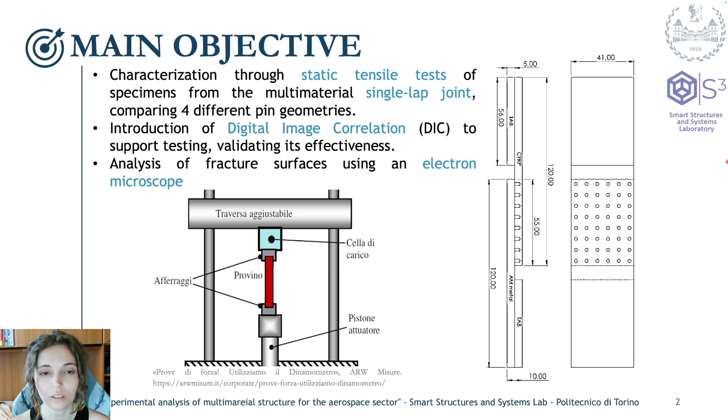First of all, the main objective was the characterization, through static tensile tests, of a new type of single lap interlock joint, introducing digital image correlation as a support of those analyses. The specimens tested were produced with laser powder bed fusion aluminum and with a counterpart made of carbon fiber reinforced composite, pressed mechanically through the pin in order to achieve the joint.

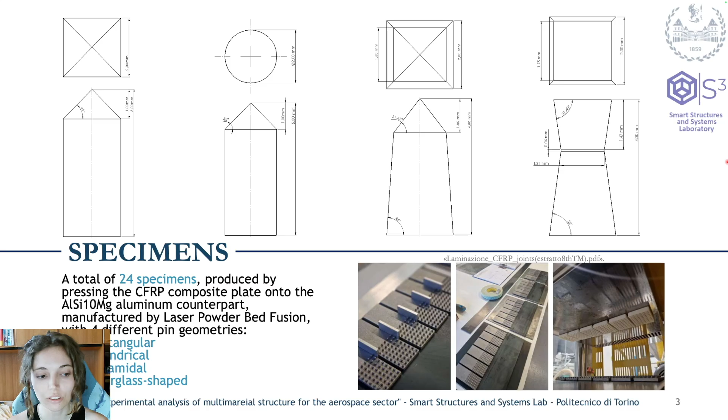We analyzed 24 specimens with 4 different types of pin geometries. We analyzed 8 rectangular, 8 cylindrical, 4 pyramidal, and 4 hourglass shaped. The tensile tests were performed using an instrument, and they led us to achieve information about the maximum load condition that a specimen can carry. We can see from those 4 images, they are representative of the 4 types of geometry.

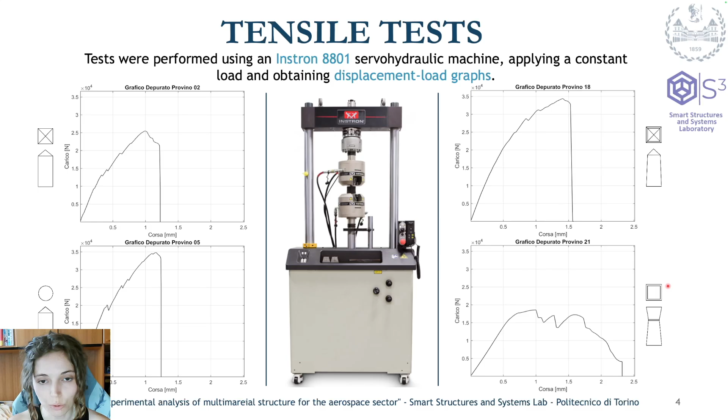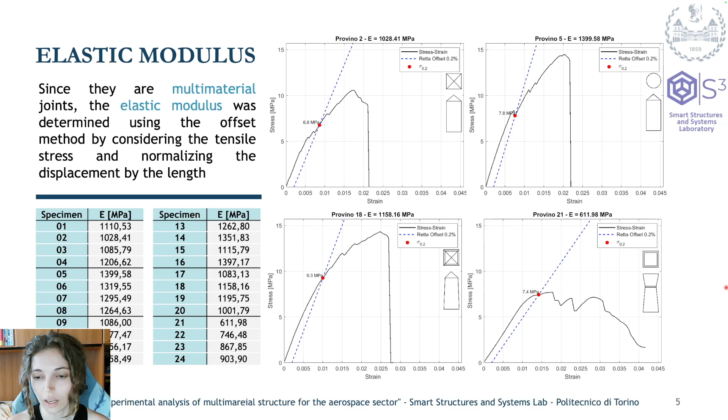We can see in fact that the cylindrical and pyramidal achieve the higher load capability, while the hourglass shaped are the worst of the 4 geometries. And using the offset method, we could calculate the elastic modulus, and once again, the hourglass shaped are the worst.

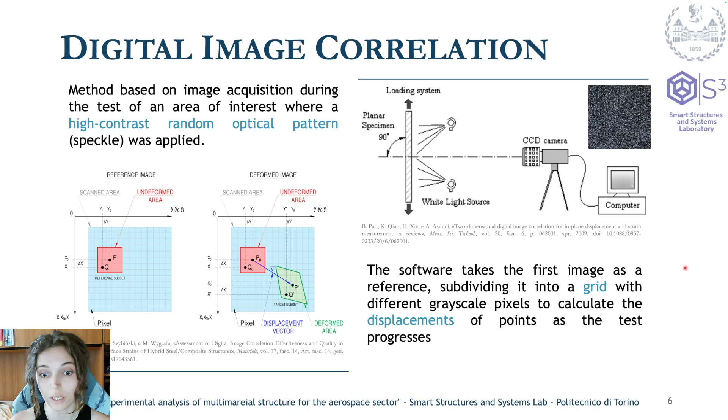For digital image correlation, we create a high contrast random pattern on the area of interest of our specimen, and this pattern, called speckle, is made of white dots on a black background. In this way, the software analyzes the interest area, subdividing it in a grid and calculating the difference between the images of the single dots in order to calculate the displacement.

The acquisition of the video of the specimen was made with a camera that records the front part and a mobile phone that records the lateral part. As we can see, we have recorded the process. The recording was useful not only for the digital image correlation, but also for us to better understand how this specimen behaves under this specific load condition. So as we can see, there is an important bending in the aluminum part that leads to some stress in this area.

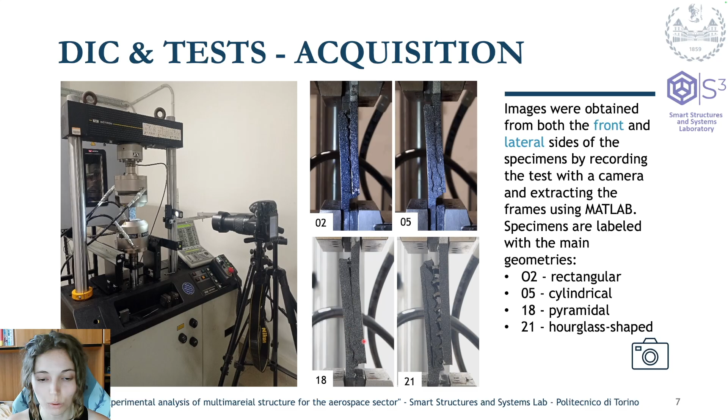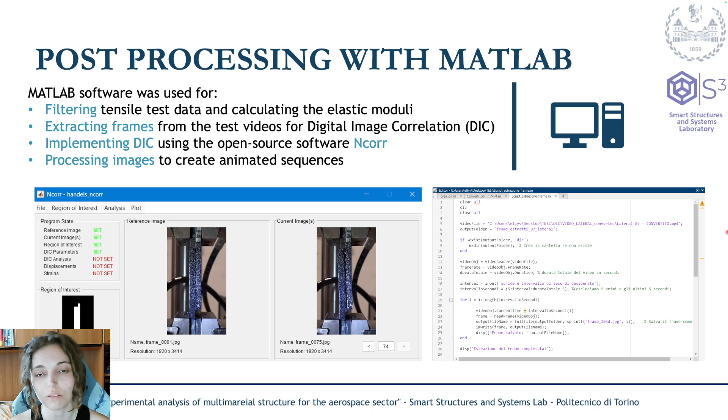For all the post-processing, we used MATLAB for filtering the tensile tests, for extracting frames, implementing digital image correlation using an open source software called Ncorr, and for processing images in order to create videos or GIFs of the tests.

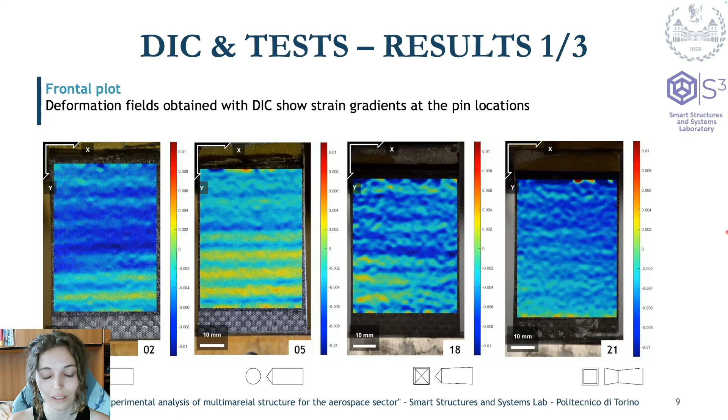We can analyze the first part of the plot, and we have the front one. We can see that we have strain gradients in correspondence with the line of the pin, while the lateral gives us a better understanding of the distribution of the strain, even in correlation with what we saw before. The important bending is reported here as a strain gradient.

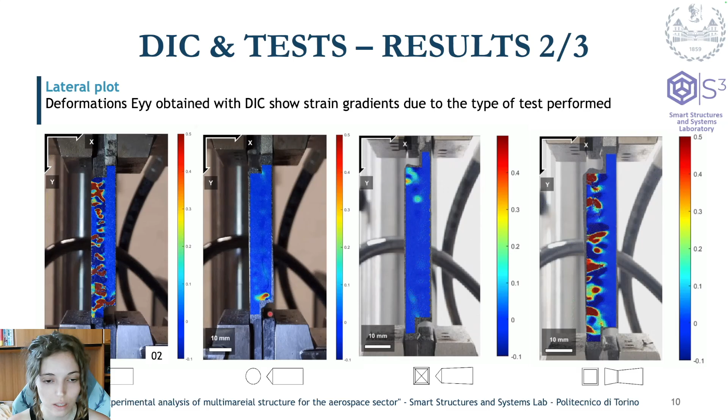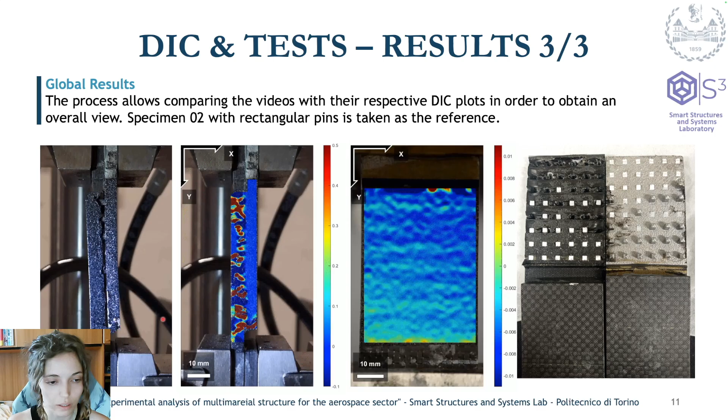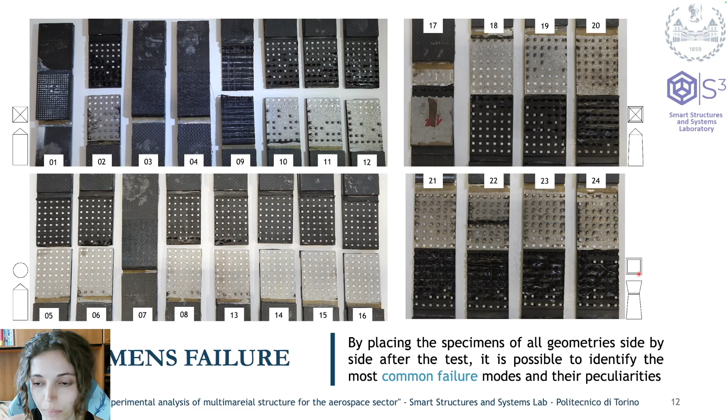So comparing all the information about one single specimen, we could have a lot of information about how the load is distributed on the parts of the specimen and how it behaves under that specific load. So comparing all the 24 specimens, we could understand better how the failure occurs. We can see for the pins with better penetration in the composite that all the pins are separated from their base. And we can see how the hourglass pins are pulled out from the composite part.

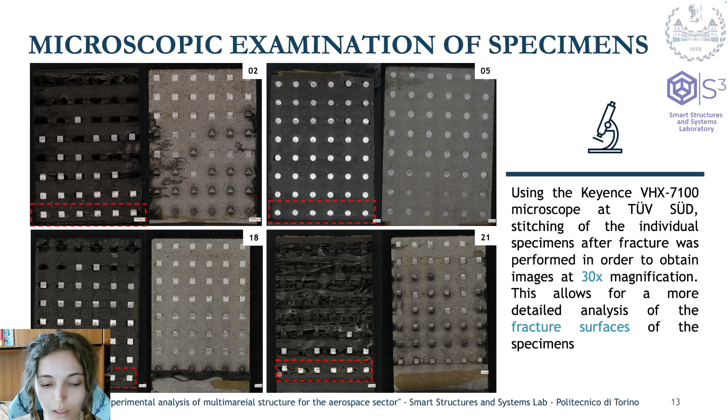By observing the fracture surface of our specimens, we can see a common behavior, and this is the presence of a crack in the composite part corresponding to this line of pins, and it's common to all geometries. This is due to that important bending that we saw in the previous slide; the aluminium going into important bending broke the base of the pin and created this crack in the composite.

During the analysis, we faced different types of error, like unwanted failure, where the aluminum plate is broken and it doesn't give us much more information about the specimen and the joints. We saw a slippage from the grips for this specimen, and this required us to remake the tests, and we have a loss of information.

In fact, in digital image correlation, where there is important separation between the two plates, we have the loss because in this region we have a high fluctuation of the data, and so it cuts out this data. And then we had a sudden change in brightness that led to lots of errors. In fact, the digital image correlation lost the contrast that helped it analyze that frame. So we needed to post-process all the images to adapt them to the first image's brightness.

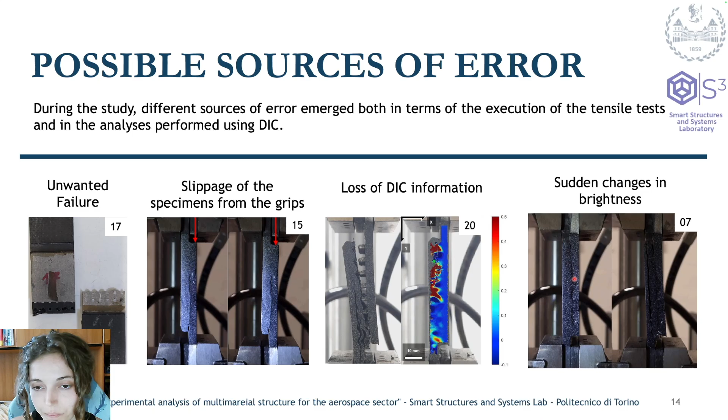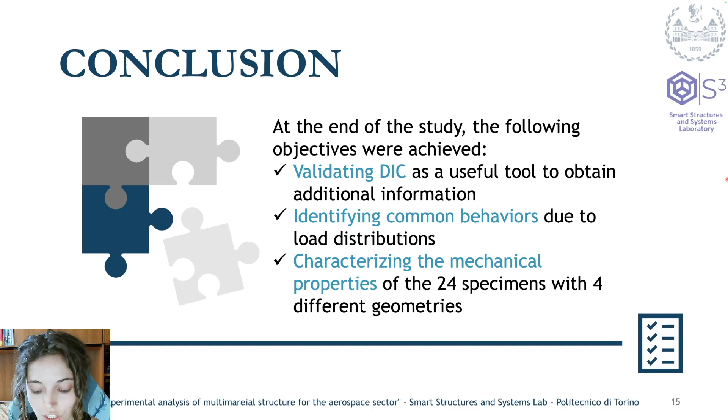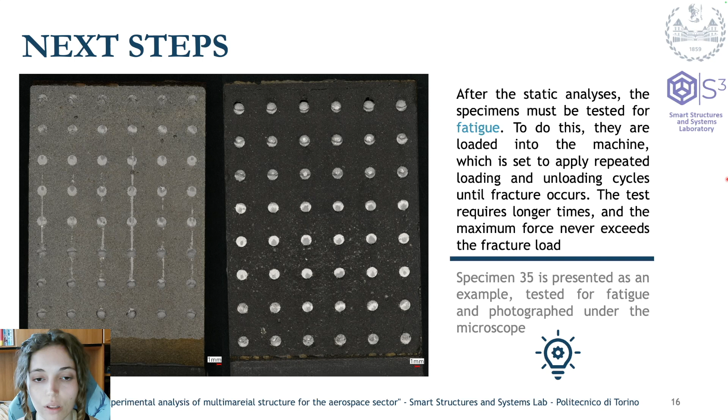So at the end of this study, we could validate the digital image correlation. We have defined some common behaviors, and we characterized all the mechanical properties of these 24 specimens. In this way, we have seen that the specimens with hourglass shaped pins aren't the best of all the geometries, so we may have to exclude them from future iterations. And for the next step, all these specimens have to be tested under fatigue in order to understand how they behave under operative life.